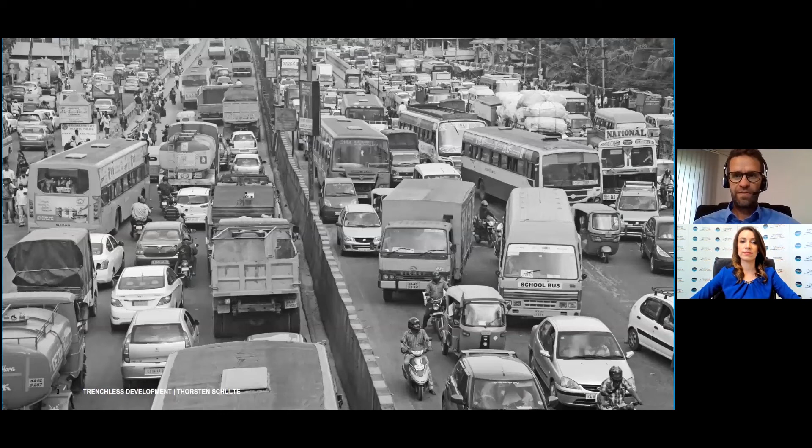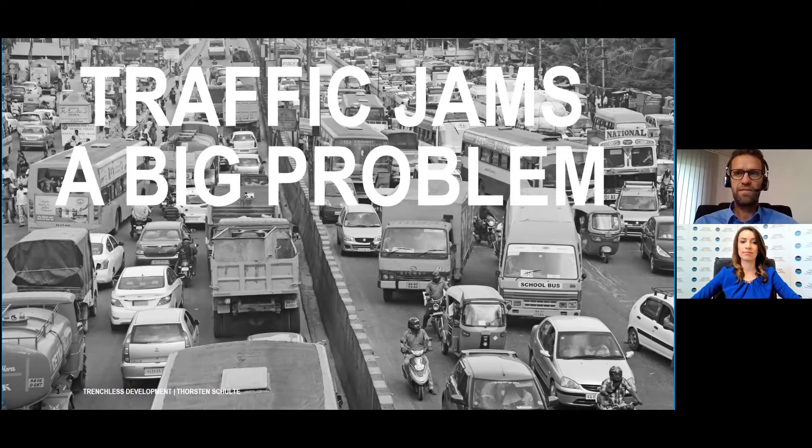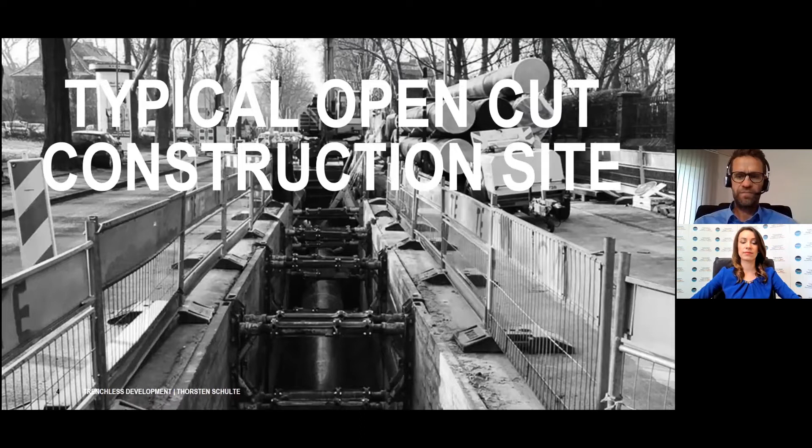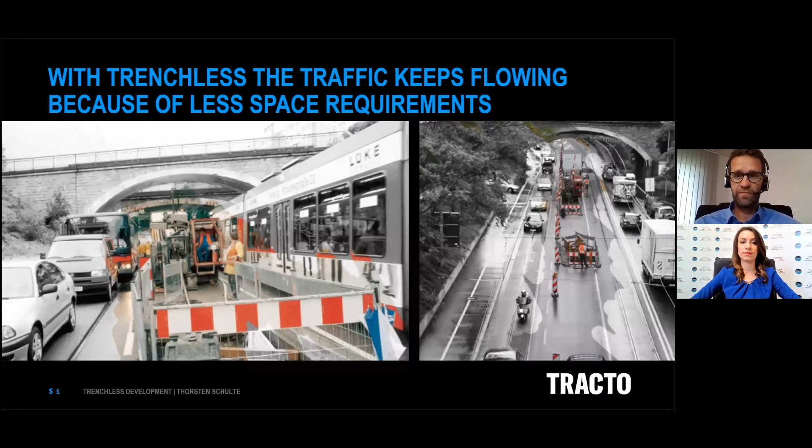First of all, everybody knows this situation. Traffic jams today are a big problem. And as you can see on this picture, it's the city of Bangalore in India, and this city has the most traffic jams worldwide. Here you see a typical open-cut construction site. And that kind of construction site definitely leads to significant traffic obstructions. With trenchless, the traffic keeps flowing because of less space requirements.

On this picture, here we have a technical application, I think. That's right. On this picture, we see a pit-launched mini HDD system. And here, trenchless definitely means also minimal impact on surfaces. Normally, for trenchless, you only need a little starting pit and a little target pit, and that's all.

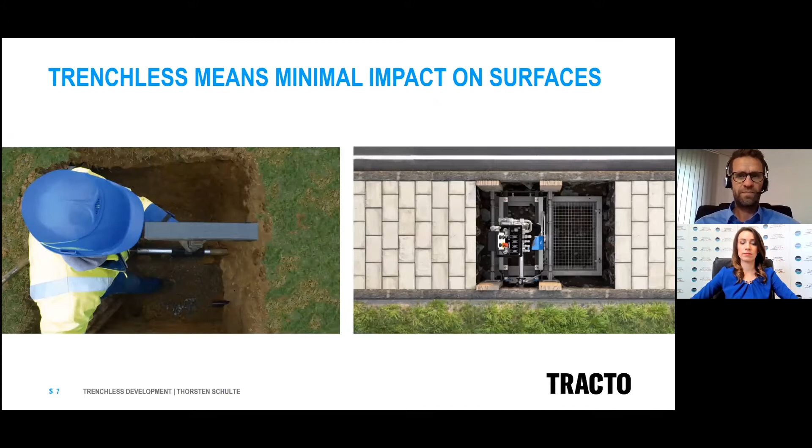Two other examples. On the left side, you see a picture of a starting pit for a soil displacement hammer. And on the right side, you see a picture where a mini HDD system is installed within the sidewalk. So less space is required. Another big advantage for trenchless is that we have minimal earth movements.

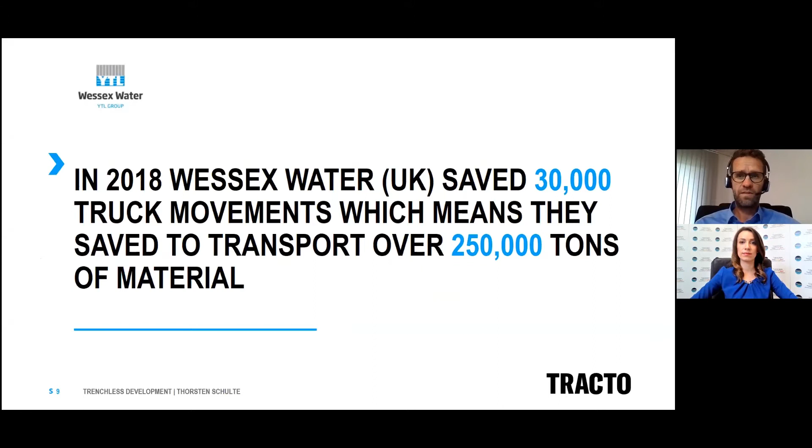Just to give you an example, in 2018, Wessex Water from the UK saved 30,000 truck movements, which means they saved transporting over 250,000 tons of materials. It's a large number. Just to get a feeling what that means, on the left side, you see the number of vehicles you need for an open-cut construction site. And on the right side, you see the comparison for a trenchless construction site. This comparison is based on an example job site from the GSTT information number 11.

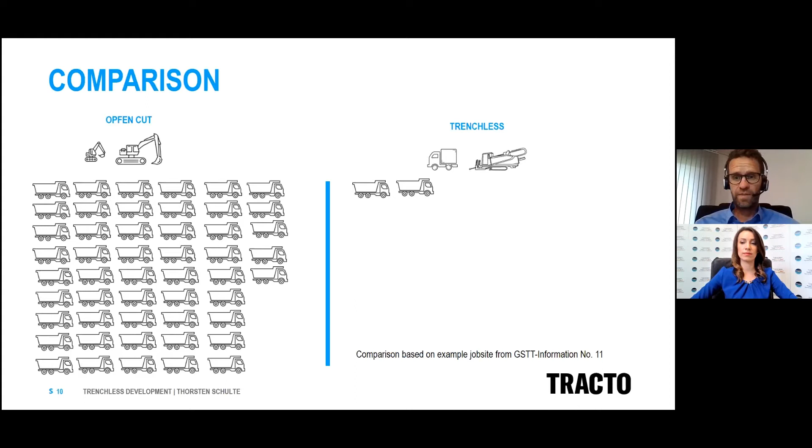The next big advantage definitely is that we will have minimal emissions based on less traffic jams and also on earth and vehicle movements. Minimal emissions, what does that mean for trenchless? With trenchless, you can reduce the CO2 emissions up to 50%. And you can also reduce fine dust up to 100%. And we also have a massive noise reduction.

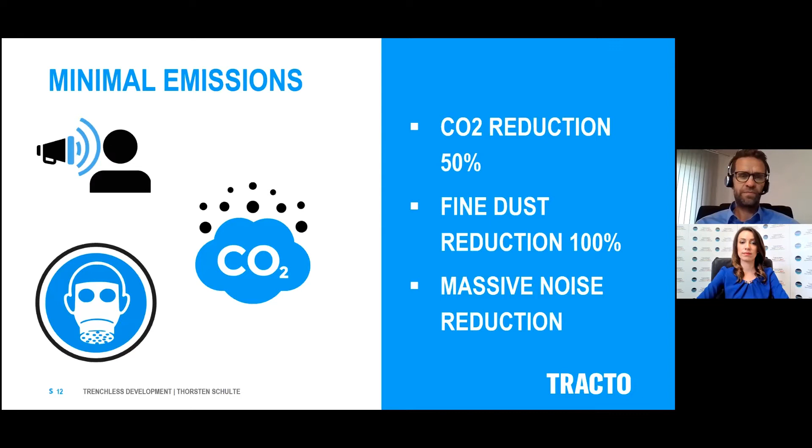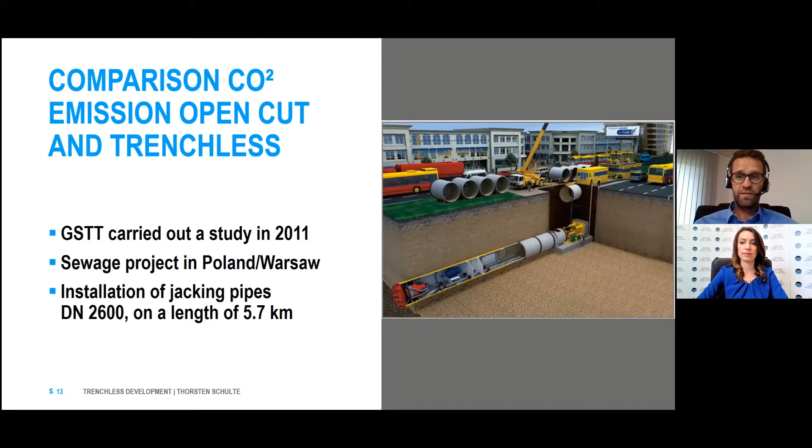In 2011, the GSTT carried out a study in Warsaw, Poland, about a sewage project. And here they installed jacking pipes on a length of 5.7 kilometers with a pipe DN 2600. And here they also did a CO2 comparison of open cut and trenchless. And as you can see on this slide, this is the result of the study.

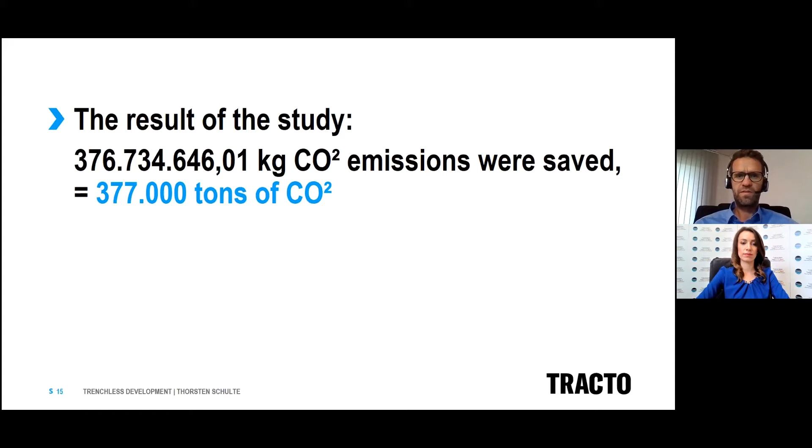And as you can see, we have around 377,000 tons of CO2 emissions saved. To give you a feeling, that means 377,000 tons is about 45,000 round flights from Berlin to New York, and that for 4 persons.

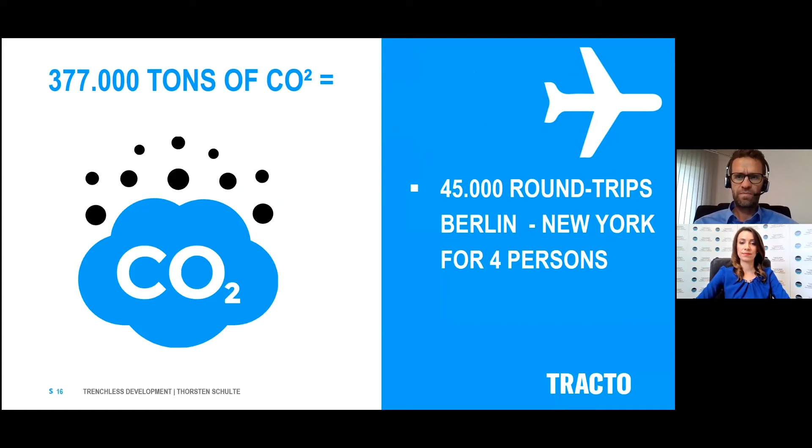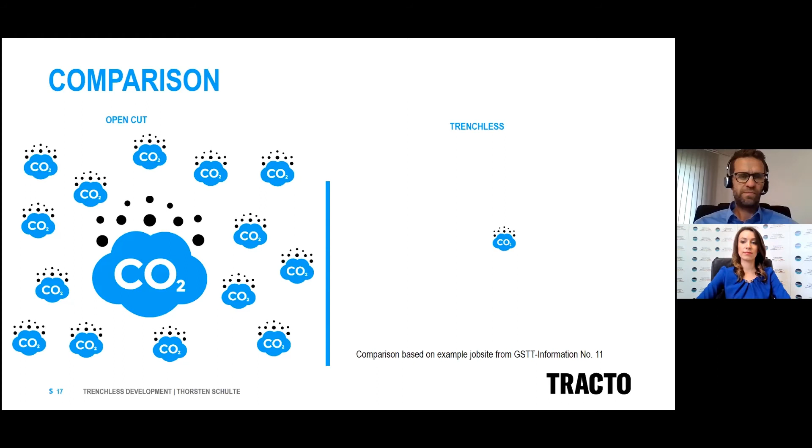Again, based on the example job site from GSTT, you see on the left side the CO2 emissions for open cut, and on the right side the CO2 emissions for trenchless. So Thorsten, I see that there are so many benefits when using trenchless technologies. Are there any other applications that can be served by these innovative techniques?

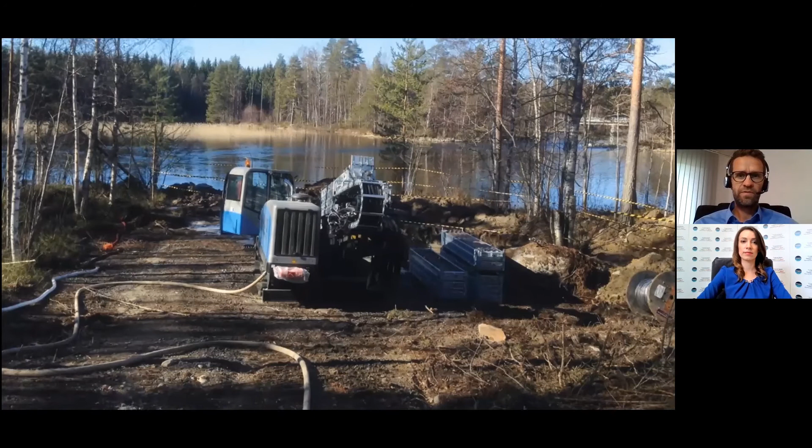And that brings me to the point that trenchless even works in nature reserves. And sometimes using trenchless is the only allowed option to do a job. As you can see on this picture, this is a river crossing. It was done in Finland to install a power cable.

And you are right, there are many, many other applications for trenchless. Just to give you a quick overview, you can use trenchless for fiber optic network installations. You can use trenchless also for the e-mobility sector to connect the charging stations. We have trenchless for sewer pipeline installations, for water pipelines, for the gas networks, for the big transportation pipelines, especially for gas, also for water, and also for oil. Electricity ground cabling, and for district heating and district cooling.

So all mentioned advantages are also good for residents. And it's very, very important and helpful to support the idea of smart city concepts for today, because trenchless then leads to very positive urban life quality effects. And if we were to evaluate the natural capital for trenchless technologies, how can we estimate this evaluation?

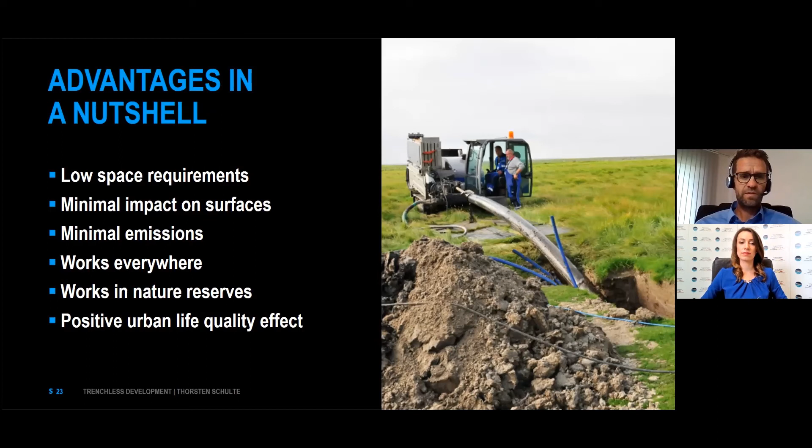And at the end, I would say, and this is the hope I have, that in the future, the infrastructure definitely is a trenchless one.